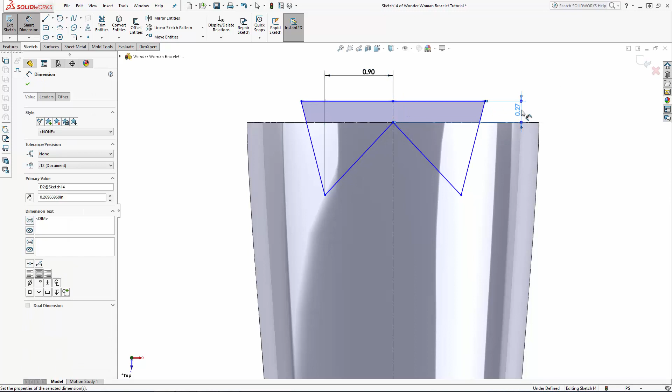Before actually doing the cut operation, I'm going to do a few extruded bosses, and I need to reference these construction lines that extend from my cut sketch.

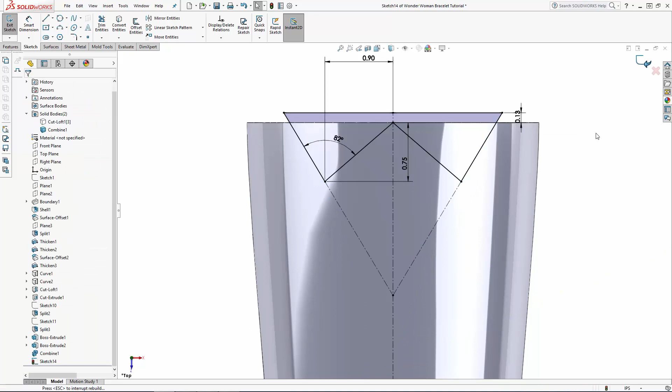Sketching on the top plane again, I'm going to sketch a 0.3 inch thick V shape whose inner lines are collinear with the W sketch I just created.

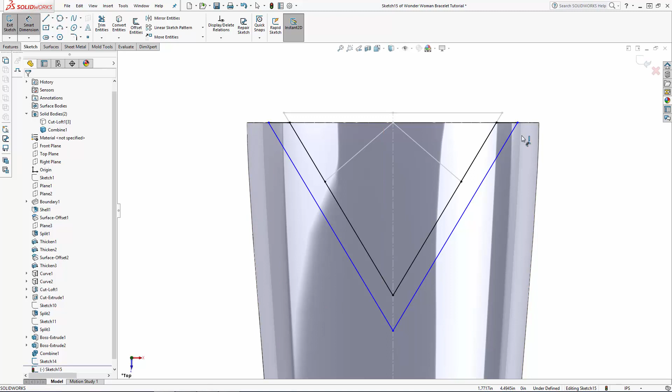Once it is fully constrained, exit the sketch and let's unhide that thickened body we created earlier in the series.

With our last sketch highlighted, navigate to the Extruded Boss tool and we'll do another boss from a surface, this time referencing the outer surface of our thickened body and doing a blind extrusion 0.04 inches.

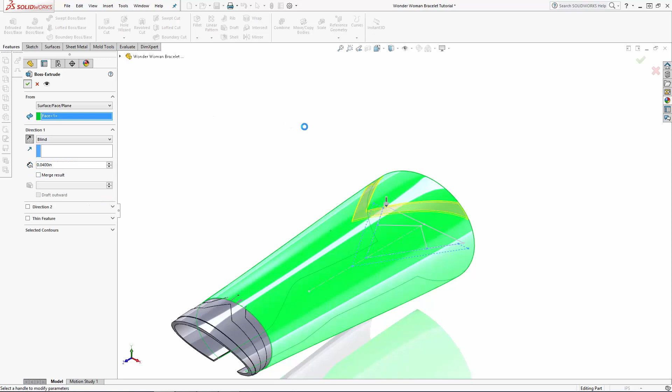Now we want to cut the back portion of the bracelet to have an angled look similar to the front. But recall we built the back elliptical profile rotated about 15 degrees, so if we do a cut through the part from the right plane, the cut will come out a little bit off kilter.

So we need to create a reference geometry that is positioned at a slight angle to the right plane. To do this, let's first unhide sketch 2, which is the front profile sketch we used for our initial boundary.

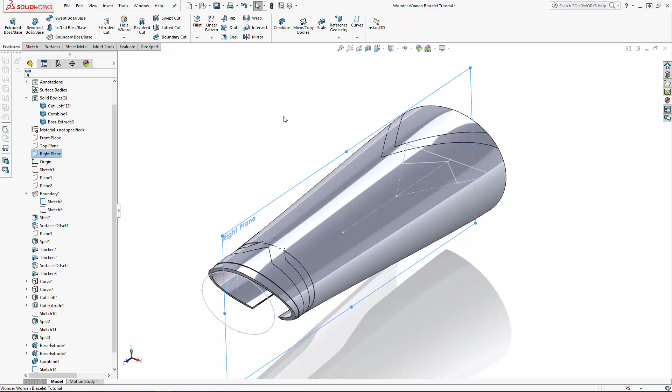Then select the right plane and navigate to Reference Geometry, Plane. Rather than offset our new plane from the right plane, let's select the angle option and set it to 4 degrees.

Then we need to select a reference to rotate this plane around, so we can use the vertical construction line from sketch 2. The new reference plane is fully constrained, but looks like it's rotated in the wrong direction, so click the flip offset option to rotate it the other direction.

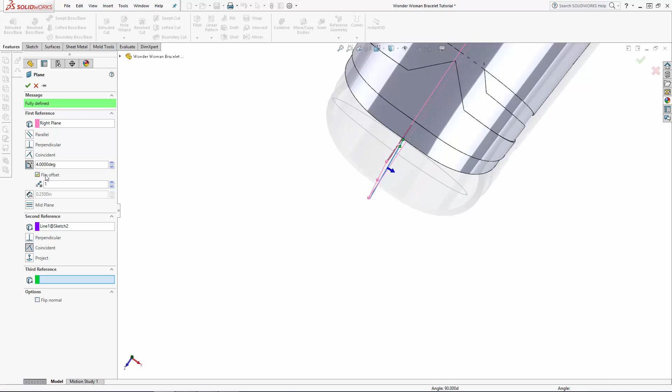Now I'll just resize the plane to make it easier to see, and then sketching on this new plane, create an enclosed sketch, which we'll use to cut the angled look into the back of the bracelet.

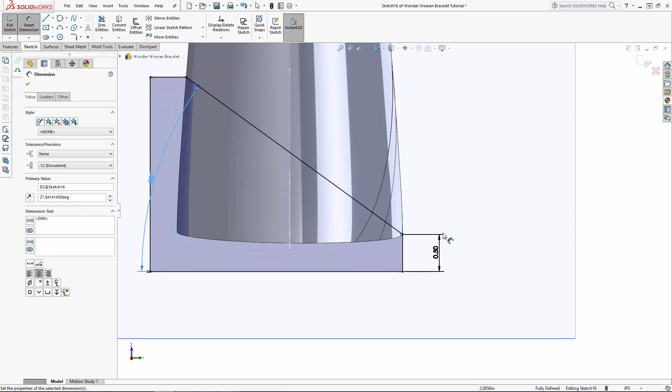Once happy with the angle you've set, exit the sketch and simply do an extruded cut on the mid-plane at a large enough dimension to cut through the whole part.

Now let's create some band detail on the back portion of the bracelet. Sketching on our newly created reference plane, I'm going to unhide the sketch we just used for the cut operation.

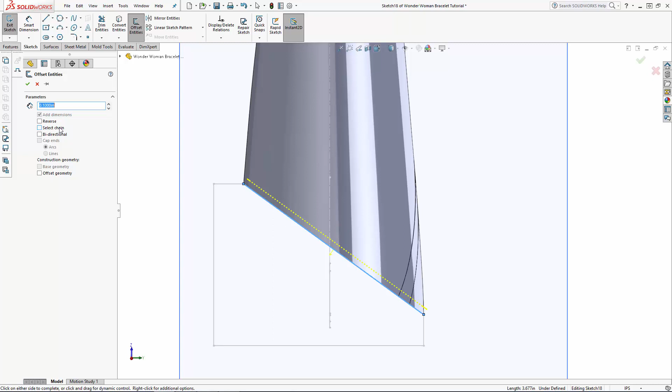I'll use the Offset Entities tool to offset just the angled line. If this operation defaults to offsetting the entire sketch, make sure this Select Chain option is not checked.

Let's offset this angled line 0.35 inches and then just pull the endpoints to make sure they pass the boundaries of the part. Exit the sketch and hide the bodies we don't want to split.

In this case, we just want to split the outer thickened body we created earlier. Highlight the latest sketch and navigate to Insert, Features, Split.

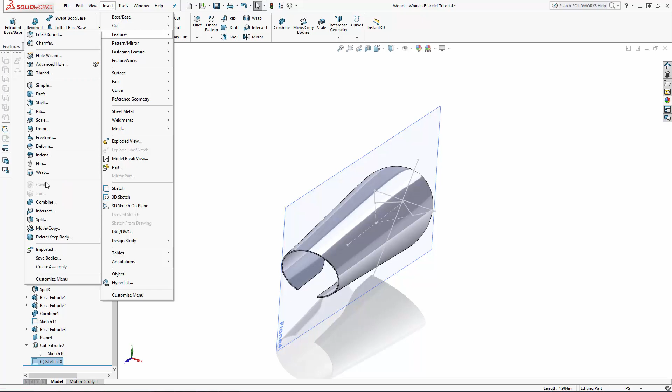Hit the Cut Part button and then select the larger portion of the body, leaving the Consume Cut Bodies option checked. Now we can unhide the other bodies and finally complete the extruded cut through the top of the parts with the W sketch we created earlier.

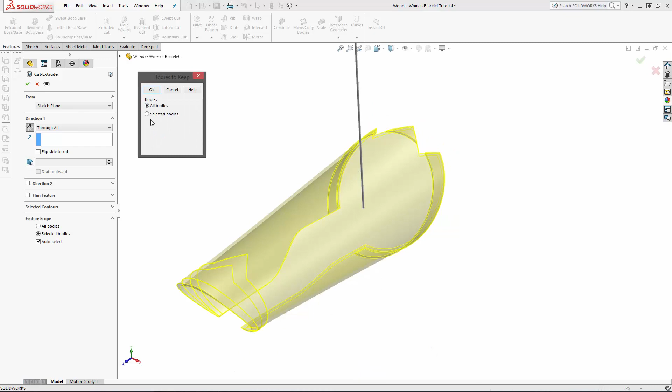Let's create one final W-shaped extrusion with a sketch created on the top plane. Notice I'm using the Convert Entities tool to make sure the upper shape of the sketch will match the existing geometry.

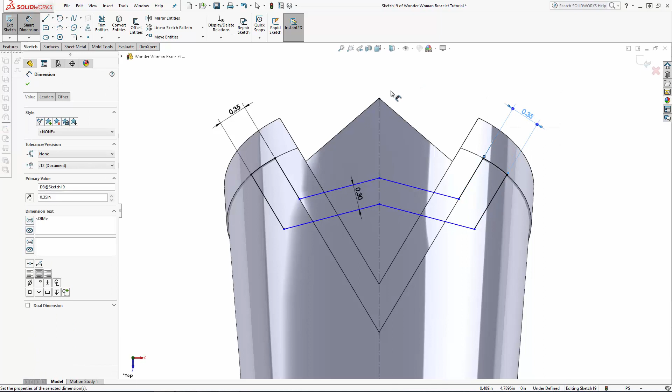Once happy with the aesthetics of this, exit the sketch and do another extruded boss from the large outer surface of the bracelet. This will be the thickest area, so let's do a blind 0.04 inch extrusion.

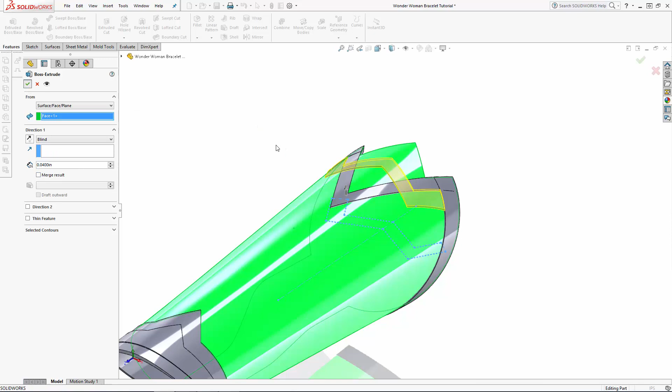With the basic extruded design elements done, we can start adding the scribed detail lines in the part. We'll do this with a series of projected sketches and the swept cut tool. Let's start with the scribes that go around the back of the bracelet.

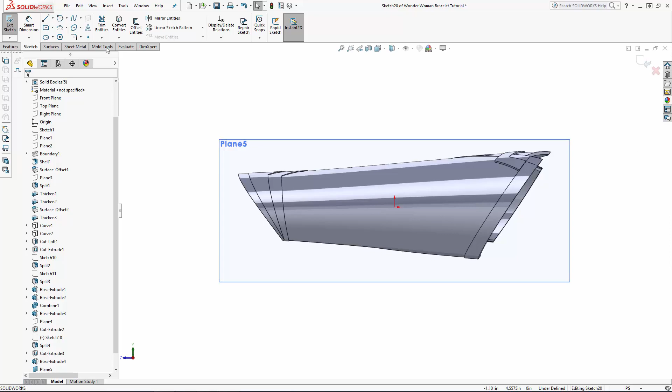First, create an offset plane from the right plane. Here I'm offsetting at 0.25 inches to make sure the plane lies somewhere within the channel area we cut through the bottom of the bracelet. Sketching on this new plane, I'm just drawing a few arcs to closely match the curvature of that thick outer band on the back of the part.

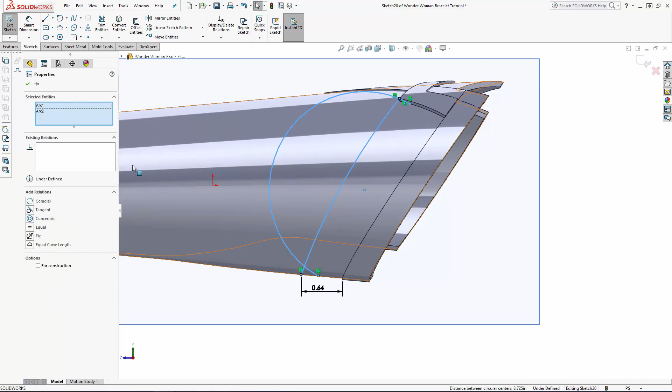Now in a second sketch, we'll create an arc offset from the first arc by 0.25 inches.

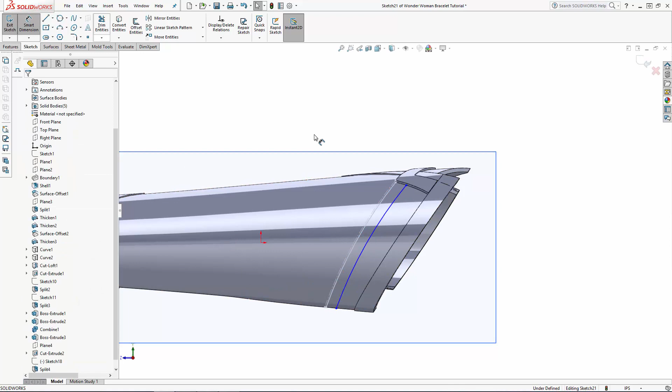Once you're happy with the shape of the arc, exit the second sketch and navigate to Curves, Project Curve, and select the large outer surface of the bracelet to project the curve onto. It's as simple as that.

I'm going to repeat this operation, sketching on both the right and top planes for all of the different scribe lines. I'll catch you on the other side.

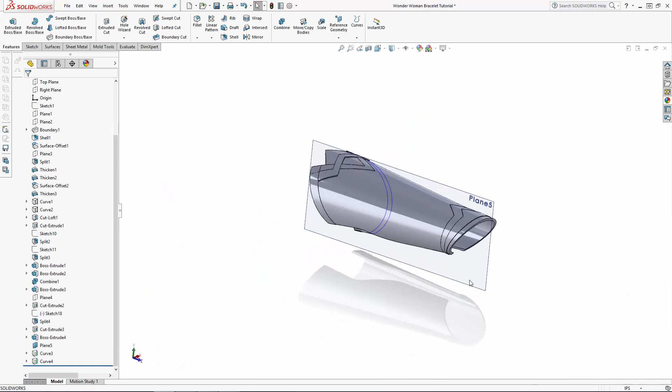So here we have all of our projected sketches laid out, which we'll use as paths in a series of swept cut operations. Rather than creating a separate profile sketch for every one of these paths, we can use a shortcut. Under the Features tab, navigate to Swept Cut, and rather than use the Sketch Profile option, we can use the Circular Profile option, where you can designate a diameter to use for your swept cut.

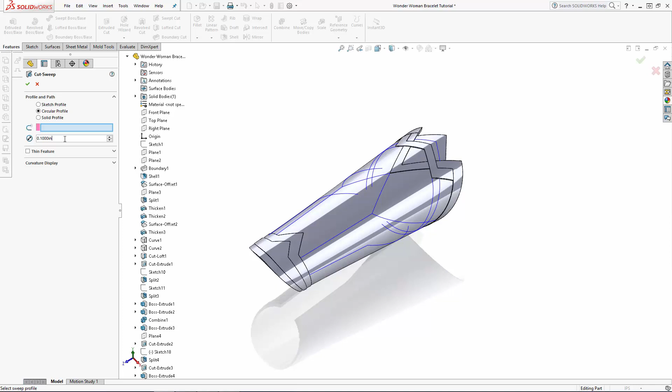Keep in mind that the sweep path will lie at the center point of the circular profile. We want a very thin scribed line in this case, so I'll set the dimension to just 0.01 inches.

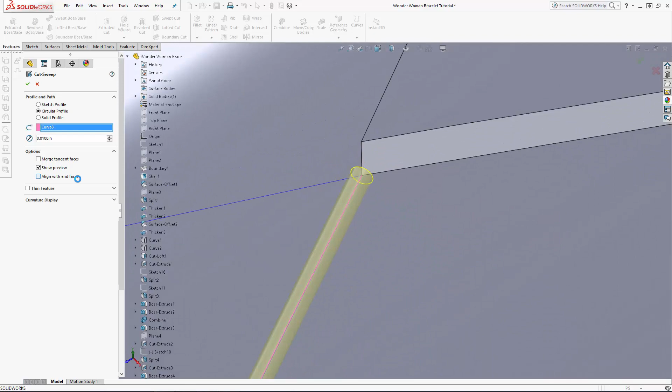For our case, we want the ends of the sweeps to sit flush with the walls that they terminate against, so I'll ensure the Align with End Faces option is turned on. Here you can see the difference of having this on versus off. So I'm just going to repeat the exact same sweep operation for all of the paths that I've created.

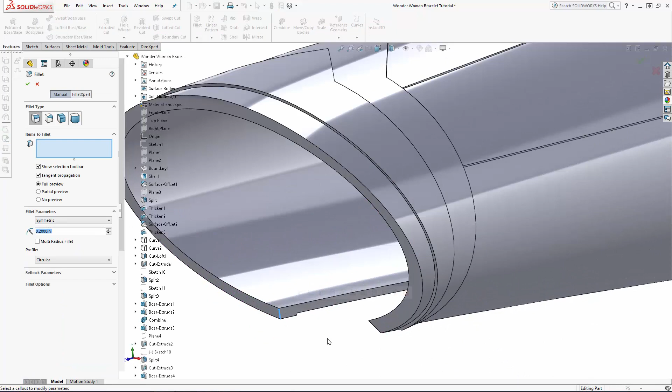There we have all of our scribed detail. To make the part a little more comfortable for Diana to wear, I'm just going to soften up a bunch of the edges with some basic symmetric fillets on some of the sharp edges around the part.

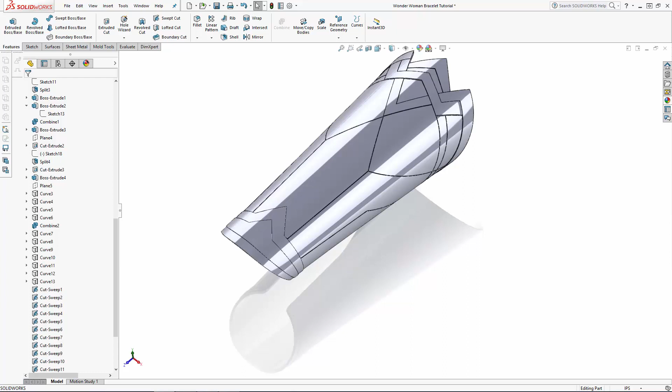Now to give this bracelet some final touches, let's just add some steel and gold appearances. I'll first drop a brushed steel appearance into the open area of the workspace to make the whole thing steel.

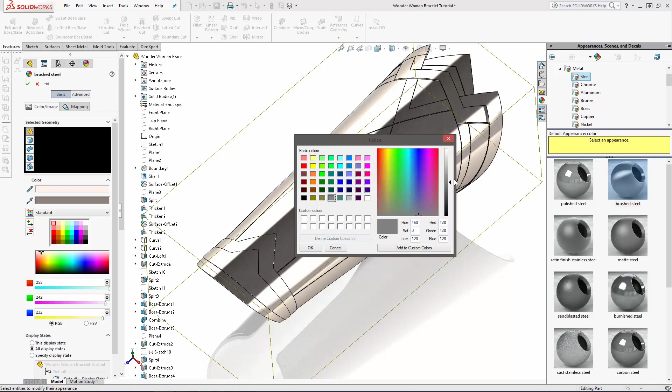Then I'll come back and add a matte gold appearance to the individual features and faces that I would like to be gold.

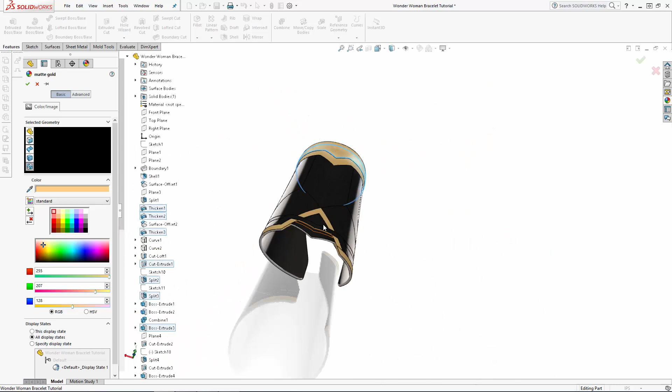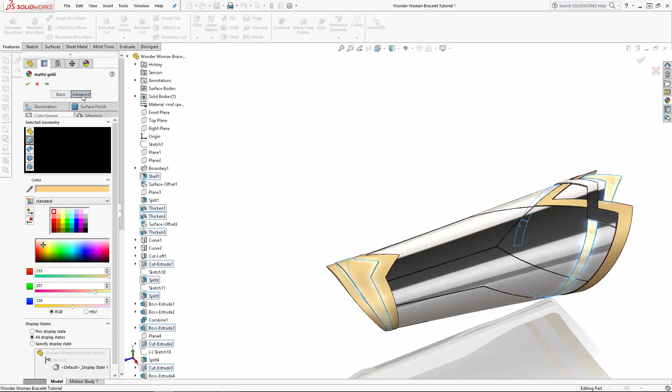Once I have all of the features and faces selected that I'd like to be gold, I'm going to enter the Advanced Material Properties area and navigate to the Surface Finish tab to change the gold appearances to have a brushed finish as well. So here we have a nice replica of one of Wonder Woman's indestructible bracelets, though it's quite a bit less battle worn.